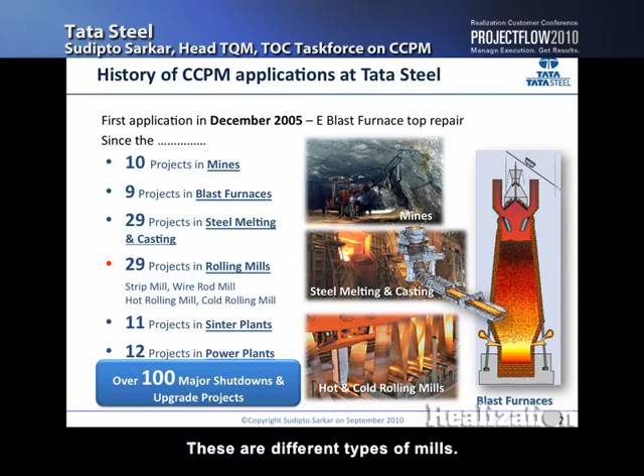These are different types of mills: 11 projects in the sinter plant, 12 projects in power plants, and over 100 major shutdowns or turnaround projects in the last 5 years. Now let me give you a project brief on what this project is all about, which I'm going to drill down further.

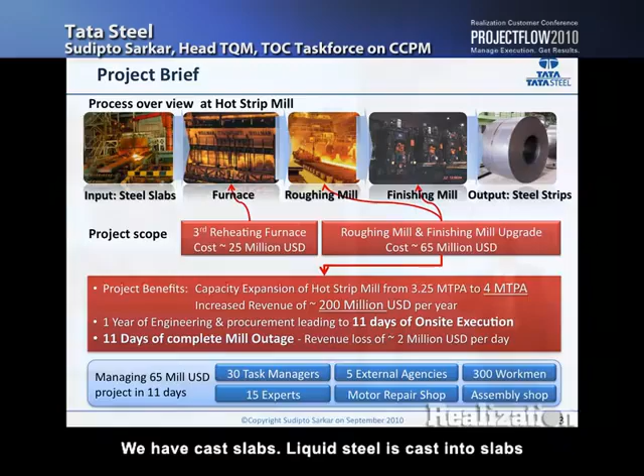This is the mill that we are talking about. We have cast slabs. Liquid steel is cast into slabs of 210 millimeter thickness and about 1 to 1.5 meters wide, 11 meters long. These are heated in another furnace to about 1100 degrees centigrade, that's about 2000 Fahrenheit.

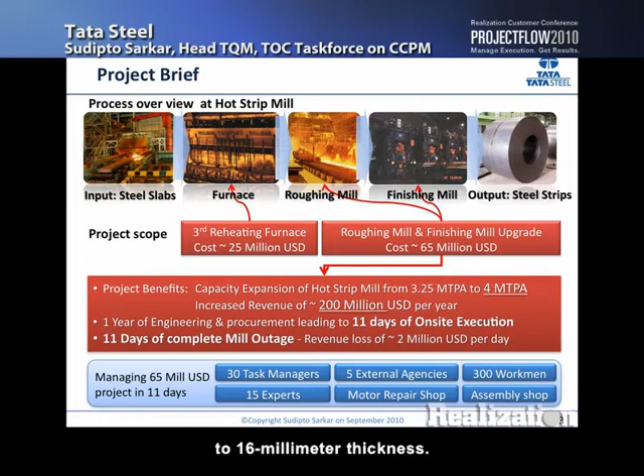Then they're rolled into something called a roughing mill, where 210 millimeter thickness is brought down to 30 millimeter thickness. Then there's the finishing mill, which is a continuous mill with 6 stands, and this 30 millimeter thick plate is reduced to anything between 1.6 millimeter to 16 millimeter thickness. This whole operation happens for a particular slab in 1.5 minutes.

And this is the final product that we are talking about. The project I'm going to elaborate on is worth about $90 million US, out of which we already have 2 reheating furnaces.

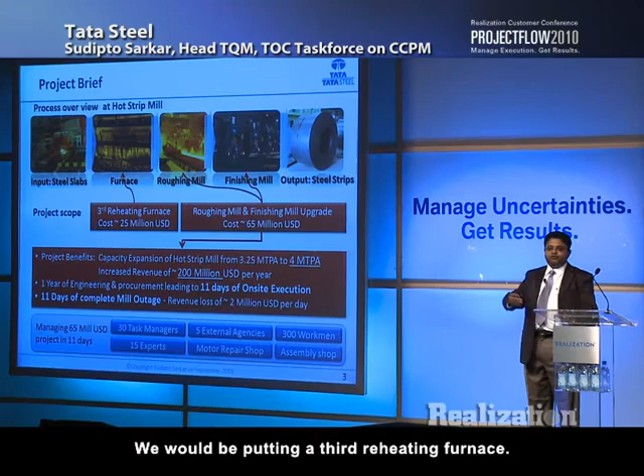We would be putting in a 3rd reheating furnace, and the roughing mill and finishing mill upgrade, which costs about $65 million US. Now this requires about 1 year of preparation.

Followed by 11 days of execution in the field, where the current plant would not be producing anymore for 11 days. By doing this, we would increase our output from 3.25 million tons per annum to 4 million tons per annum. A 0.75 million ton per annum increase results in about $200 million per year of revenue.

And each day the plant is out, not producing, we lose $2 million per day. Before this, we were producing around 10,000 tons per day out of this plant. We would be producing 12,000 tons after this.

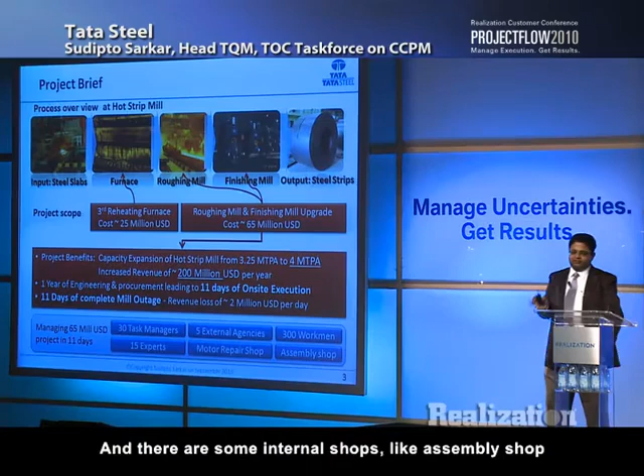So what was needed in this project was $65 million getting installed in 11 days, with 30 task managers, 5 external agencies, 300 workmen, 4 different countries, 15 experts, and some internal shops like the assembly shop and motor repair shop and so on and so forth.

Now, just to give you an idea about Tata Steel hot strip mill and the group, the Tata group is 140 years old with a turnover of about $70 billion. The Tata Group is into everything from cosmetics to steel to mines to automobiles and so on. The Tata Steel Group is the 8th largest steel producer in the world with a turnover of $33 billion.

Now, where I come from is Tata Steel India, located in a place called Jamshedpur in the eastern part of India. This part has probably some of the richest iron ores available in the world. It's literally pure iron ore, with 67% iron content. If you break up Fe2O3 into its molecular weights, you would get 67% iron, and that's what we have over here.

So a very beautiful place to have a steel plant. And of course the other thing required in a steel plant is coal, so we have coal mines all over this place and iron ore mines all over this place, very close to each other. Our last year's turnover was about $6 billion. We own our own raw materials, and we are famous for corporate social responsibility.

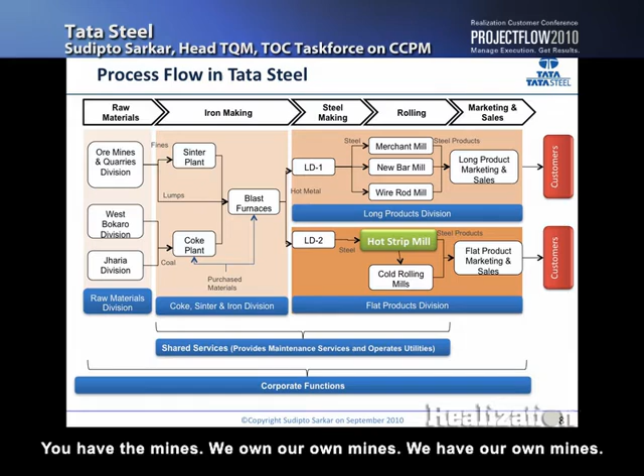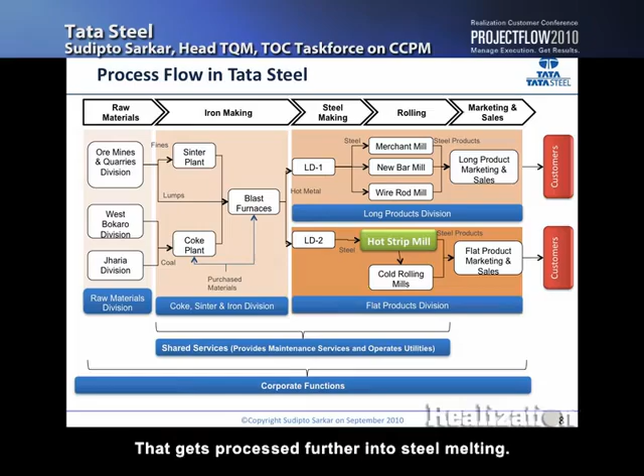Now, this is the process flow in Tata Steel. You have the mines, we own our own mines. That gets produced through different processes through the blast furnace into something called hot metal, which is more of a cast iron. That gets processed further into steel melting, that's LD1 and LD2, which gets further rolled into different shapes. This is the mill we are talking about, where this particular case was implemented.

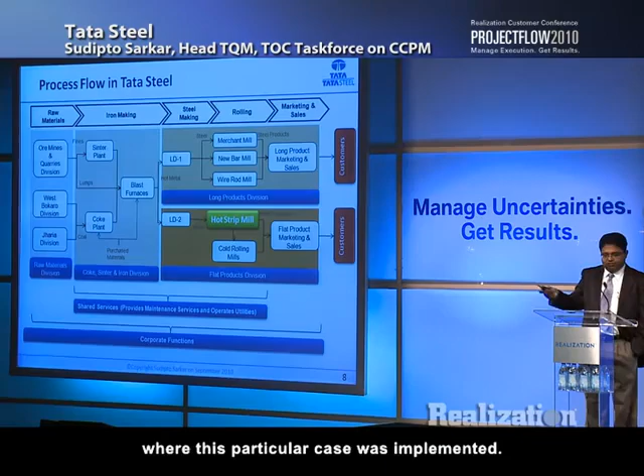Right now, to talk about the mill, we are talking of 2 furnaces, reheating furnace. The input is 210 millimeter slabs, and the output is 1.6 to 16 millimeter thick sheets. We have 2 reheating furnaces. This $90 million expansion would result in a 3rd reheating furnace.

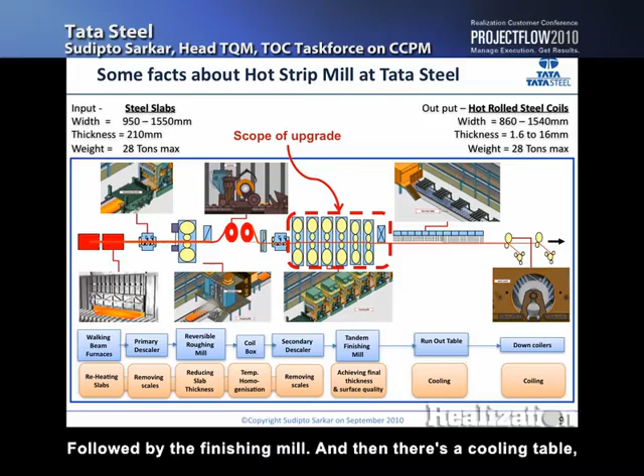This is the roughing mill in between, followed by the finishing mill, and then there's a cooling table, and then there are coilers where the material gets the coil form.

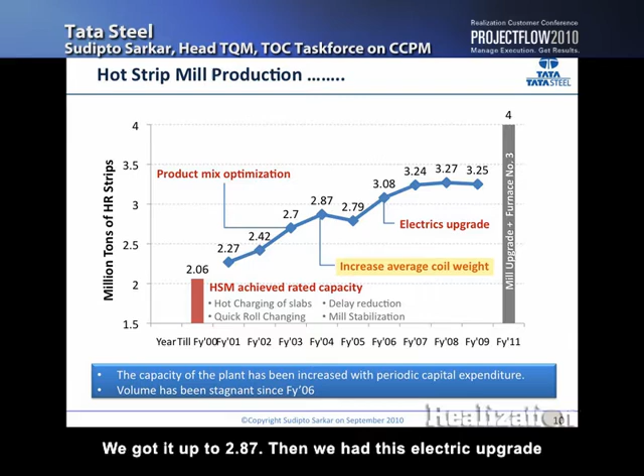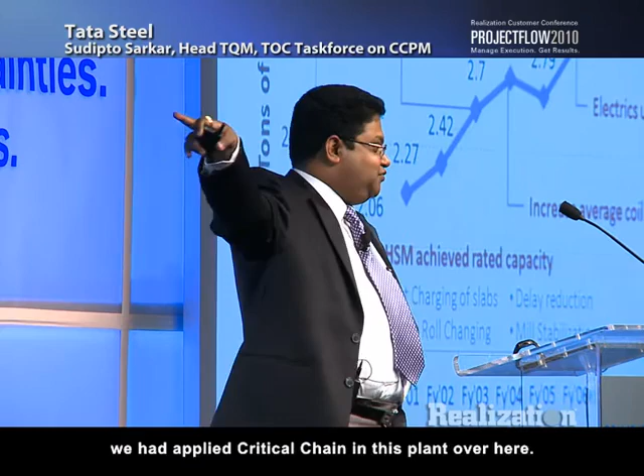Now, in the past, when this mill started, it was a 1 million ton mill per annum. We improved it to about 2 million tons, and then there was gradual improvement by product mix, by increasing average coil weight, which got us up to 2.87. Then we had this electric upgrade, which got us to 3 million plus. That was the first year we had applied the critical chain in this plant. It then remained stable at around 3.27 million tons, and with this investment, it would go up to 4 million tons.

Now, why this investment in the first place? As was being said, India is growing at a phenomenal rate. Steel demand is growing at 12% average growth rate. That's crazy - in 6 years, you need double the capacity of the country than what we have today.

But there are a lot of socio-political reasons for which a greenfield expansion is very difficult. So a brownfield expansion is much easier, and it made a lot of sense to increase the capacity of this mill rather than put up a greenfield expansion.

Now, this shutdown would take 11 days for this upgradation to happen, and the throughput loss would be around $2 million per day. So if I can manage to save 1 day, that's $2 million for the company.

In order to fulfill the annual business plan of production, there's a measurement for all these mills known as net operating hours, which is availability. We needed an availability of 6,778 hours for the entire year. This could be achieved through regular, periodic stoppages of the mill, and one of the things that would help us achieve it is 9 days of shutdown.

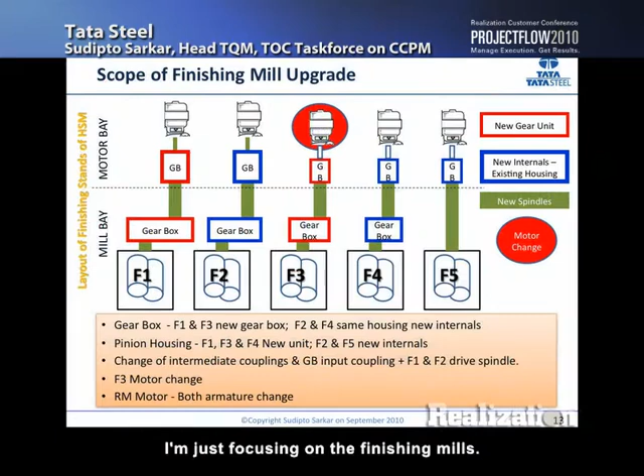What was the scope of shutdown? I am just focusing on the finishing mills. I have shown just 5 stands over here because that is where the changes happen. The 6th stand did not have any changes.

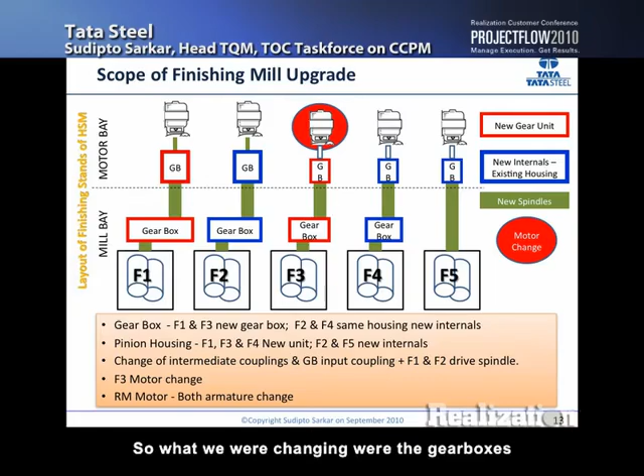What we were changing were the gearboxes and the F3 motor, and there were a lot of dependencies within this. I will talk about the dependencies as we go along. Each one of these gearboxes weighs about 45 tons, so you just can't pick them up and take them somewhere and then put a new one in.

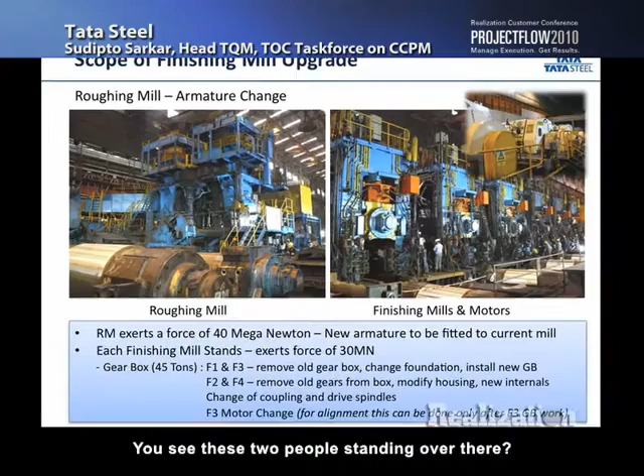Just to give you a scale of things, you know, the roughing mill that we are talking about - you see these 2 people standing over there, and that's the size of the mill. Now, this is the mill part.

To support these, the drive part is behind a wall, and that had to be taken apart and sent back, some to the repair shop and others to just take away and put back new stuff into it. And these are the finishing mills that we are talking about, and these are some of the motors.

These mills require to exert a load of about 40 meganewtons. The motors driving them put together require something like 30 megawatts of power when they run. The city that I belong to, Jamshedpur, consumes somewhere around 550 megawatts in all, including all other industries - there are lots of industries over there. All our industries put together is around 550 megawatts, and these few mills put together consume about 10% of the whole power. So that's the size we are talking about over here.

In terms of motor change, what are we looking at? First remove the covers, and this is all of 30 megawatts. So the entire weight is about 60 tons of this motor.

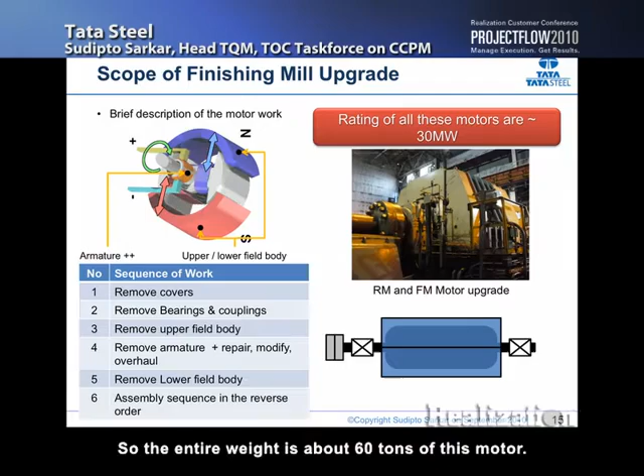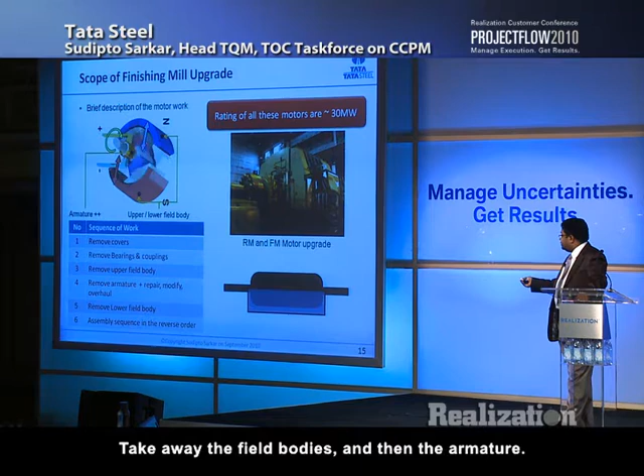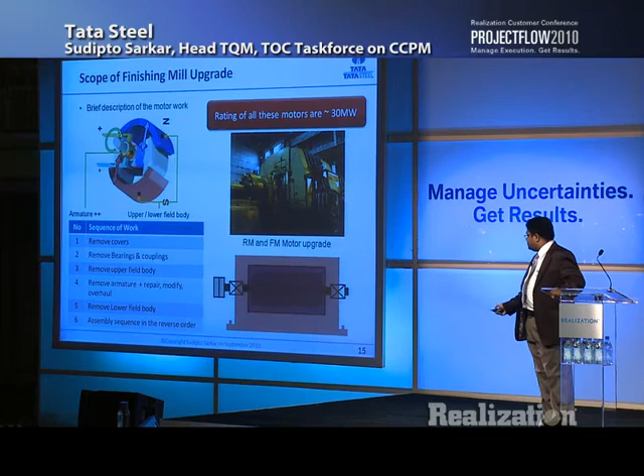Remove the cover, take away the bearings and the couplings, take away the field bodies, and then the armature, and then put them back again. And this had to be done in 65 hours. Why in 65 hours? I will talk about it as we go along.

Now, when the plans got made, people thought this is the way the project would happen, and this would take 11 days. Now, obviously in this there is commissioning of 54 hours. You really do not know what is going to happen during commissioning, you can't really predict that, so you can't do much about it. So this is gone.

When we got the people together, Teco Westinghouse and SMS Demag, we realized that this job can only happen after this, otherwise there would be major alignment issues. So 11 days - no way.

Now this is where it comes in. In order to get it to 11 days, the only way we can do it is if the motor work can be completed in 65 hours. Then we can bring it back. So if you take that out, then all that we are left off with is uncertainty.

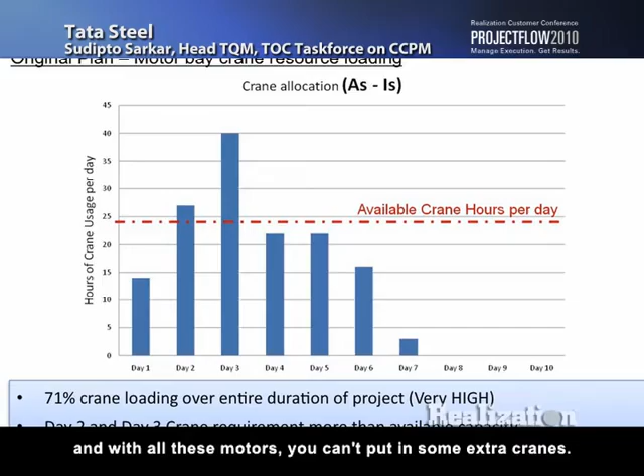Now that's one dependency, and the other one was - the entire place where all these motors are is a room of about this size, maybe twice the length, and you have all these motors, and with all these motors you can't put in some extra cranes. There's only one EOT crane in the motor bay on top.

Now this crane had a load distribution in terms of loading like this. Obviously it gets booked for 7 days, but in between there are days where you need twice the crane capacity.

Now this was a big issue, and there wasn't enough space to get in another crane. And we're not talking about small size cranes here, we're talking about cranes which can take in 50 to 60 tons of weight. So mobile cranes really can't get into that space.

Right, so this was the other problem in terms of crane capacity.

While preparing this presentation, I was wondering if I were to make it before the shutdown, I wouldn't be showing this slide, because this was a completely unrelated project. Some pipeline being brought in, this is about a 3-kilometer long pipeline, 2 meters in diameter, a new gas pipeline needed for the third furnace.

For this shutdown to be up, the last part of this pipeline was connecting it to some lines of our current furnace. So unless that connection is made, there's no way we can start the current furnace's operation. And if that doesn't happen, it doesn't matter whether the mill starts or not, the plant can't start, because you need the furnace slabs to be heated.

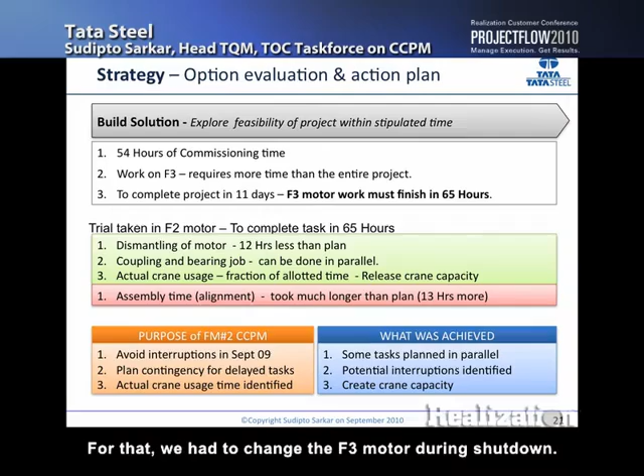The first thing was to evaluate whether this project is actually feasible in 11 days. For that, we had to change the F3 motor during shutdown. But then we also had to change the F2 motor at some point of time.

So this was a good opportunity. We took up the F2 motor and wanted to check whether it could actually be replaced in 65 hours. Dismantling took much less than we had estimated, but alignment and all took much more than we had estimated. All put together, we could understand where the pitfalls were, what areas we could get stuck in, and there were obviously actions taken to prevent it from happening.

The other was crane as a resource. Now, my experience says you might say, okay, at the end of the day it's 71% of the total duration, but during commissioning you don't need the crane, so that goes off. But even at 71% of any resource capacity booking, it's very, very high to manage.

So what we did was we staggered the crane usage in such a way that we could evenly distribute it. We first did an early start, early finish, that's what you saw in the previous graph. We looked at late start, late finish, and we realized there was day 4 where there was very little crane usage, so we managed to stagger some tasks into that area.

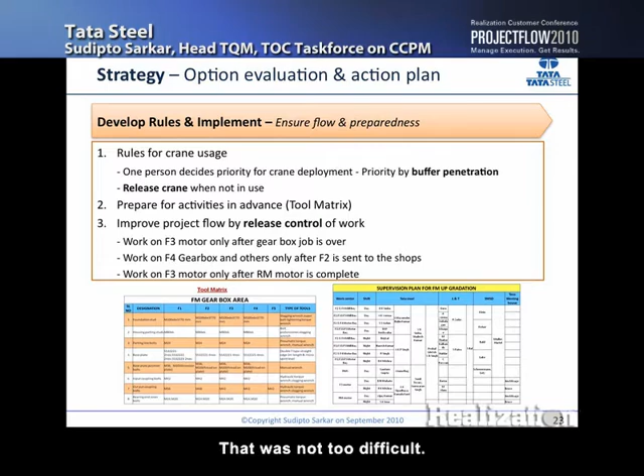Then the big one, we had to change the rules. In terms of crane usage, the rule we put in place is only one man decides where the crane will go. Now, that was not too difficult.

The other part was release the crane when you don't need it. We had to go to the extent of creating certain punishments for people, that if I have the crane and I'm not using it, then I'm in trouble. So if I'm not using it, leave it. Doesn't matter if it's idle, but leave it. Just don't keep the crane to yourself.

The other part was the tool matrix that you see over here. And of course, in terms of the supervision plan, it was 24/7 working, so accordingly the supervision plan was worked out. The other part, of course, the last was release control of work.

Now, as Dave also said, for all technicians and mechanics, you give them a screwdriver and a spanner and they will find something to open and close back again. That's very true all over the world. Now, release control is a difficult thing to implement. In fact, I think that's the most difficult thing to implement while implementing critical chain.

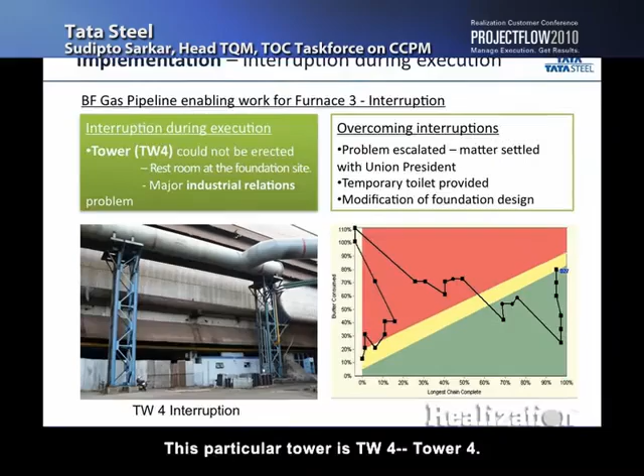The third place where we had a major interruption was something we had no clue about, this project wasn't even in focus. There's a pipeline at this point, and this particular tower is TW4, tower 4. When we were monitoring this project, after 1 or 2 days, we realized that at tower 4 the job is stuck.

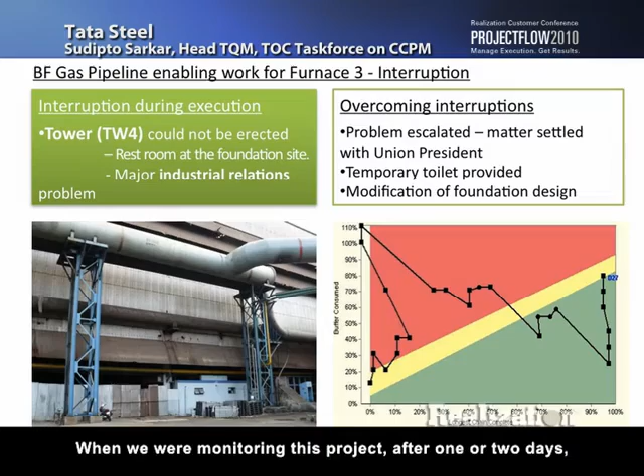Whenever we asked these people what happened to tower 4, they would say, oh, tower 6 is ready, 10 is ready, 8 is ready, everything is ready, so why are you worried about tower 4? Day 1 that happened, fine. Day 2, exactly the same thing happened, they were not ready to talk about tower 4, but they were ready to talk about everything else, where the progress was very good.

At the end of the review meeting, I asked the chief of this hot strip mill, why don't we just take a walk and see why tower 4 is stuck? We went there, and both of us started laughing, because there was this workers' restroom, exactly at the place where the foundation was supposed to be built. Tinkering around with restrooms is a major industrial relations problem.

We realized that, and the other part was there was the shop over here, so the line had to bend, needed a bend over here. We couldn't bend it too much because gas flows and liquid fluid flows are very complex subjects that designers don't want to talk about.

So we immediately escalated the matter right up to the president of the workers union. We went to him and said, look, this is the story, just give us some time, we'll make a temporary arrangement and shift the toilets. The designer was put in, because once you have these restrooms, you also have the underground sewage line and water lines and so on.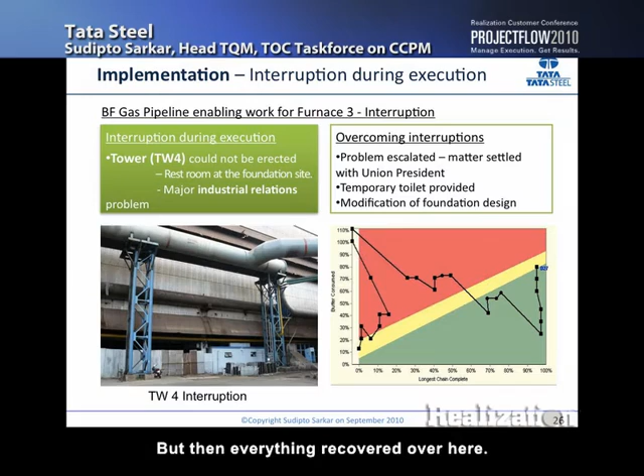So the whole foundation had to be redesigned, and that's why this is the trend chart of this particular project, an unrelated project, where it got stuck, was going up, then went straight back because we had to redesign the stuff. But then everything recovered over here, don't worry about this vertical line. Towards the end, they were actually ahead of the finishing mill project, so they had to wait just to make those final connections to the current furnaces.

In terms of results, the biggest satisfaction we derive from implementing critical chain is that in most of these organizations, you have operations staff and maintenance staff, and if the engineering staff comes in, it's a real mess. I mean, they spend more time fighting rather than doing projects.

One good thing that happened about implementing critical chain in all projects in Tata Steel was the fact that there was major harmony among the entire team, and for the whole team it was the project that was important, not individual groups. The other big gain we have seen in implementing critical chain in Tata Steel is...

In the 5 years of critical chain implementation, it's very difficult to make or establish a correlation, but steel plants are pretty infamous for fatality, all over the world it's like that. We have DuPont as a consultant on industrial safety for us, grooming us on safe practices as well. Recently one of these DuPont consultants made a comment that he doesn't know what we're all doing with these shutdowns. 5 years, so many shutdowns across the plant, not one fatality, not one accident. So we must be doing something good. Now I don't know whether it's because of critical chain or not, but it could be because once you start having low WIP into the system, you have less activities going on at any point of time, so less chances of accidents.

As a result, last year we finished at 3.65 million tons. This year we will finish at around 3.87 million tons, and next year we will cross 4 million tons. In terms of net operating hours, or availability, these are the benchmark levels, and we are at 6690 last year. So that's slightly better than — we didn't achieve our target, but we are slightly better than the best in the world. In terms of savings, those 2 days saved us $4 million.